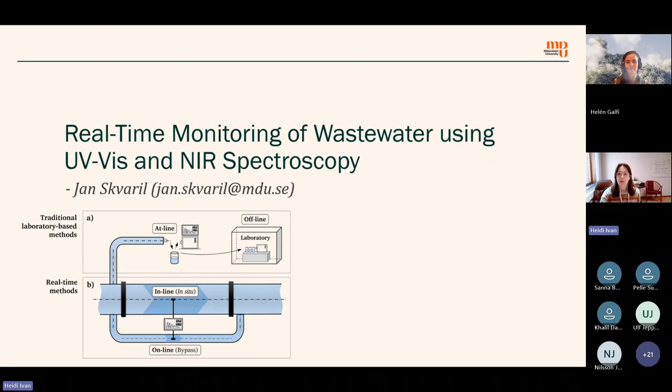Traditional laboratory-based measurements are usually used for quality control, and they can be quite expensive. They can also be time-consuming. They almost always introduce a delay. You don't have the result at the same time that you take the sample.

This makes them slightly harder to use for online process control, which really benefits from rapid measurements. Real-time measurements do not have this issue of delayed results, but are unfortunately often unreliable. This can be due to the harsh environment we have. Wastewater is not a very pleasant place for sensors to exist in. The sensors can be fouled, they can have a lot of wear and tear, and this can mean we have a lot of interference in the measurements.

But there's also the aspect of wastewater being a very complex mixture. That means we can have great challenges in detecting trace amounts or very low concentrations of very specific pollutants. But these real-time methods are evolving very quickly, and literature shows great promise to use them to detect contaminants that have traditionally been limited to offline analysis.

In this project, the proposal is to use UV-Vis and near-infrared spectroscopy as a real-time analysis method to detect a range of contaminants, probably a little bit up to you and your interests, but what we have been looking into up until now is heavy metals.

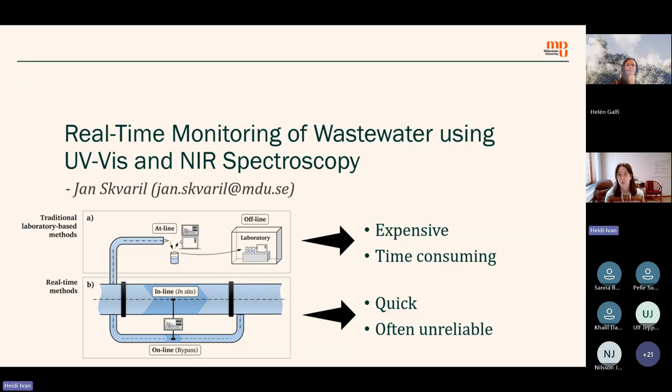In this project, if you work on it, you will have access to the existing data, but you will also have the opportunity to collect new data and develop the data set further. We have a UV-Vis spectrometer with a fiber optics probe for measuring in solutions. We also have a Bruker matrix dip probe and a micro NIR. We have other spectroscopic methods that could be used, but these are the ones that show the most promise for generating a data set that can be used for these purposes.

Then the main part of the project is, once you have this data, can you do the model development? We need to correlate the spectra and the laboratory results to try and see if we can predict what the laboratory results would be from the spectrum.

There's a lot of data analysis involved in this. Use machine learning methods, any sort of models that you want. I think so far we've been working with PCA-based models, but there's a lot of other options that can probably give higher accuracy.

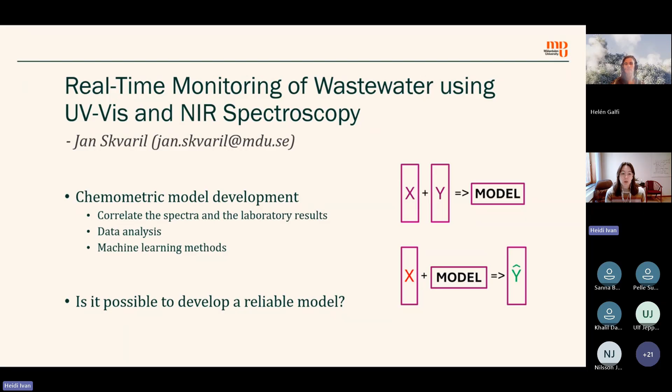The second project that I have to present is on behalf of Sebastian Schwede. This project does not involve any hands-on experimental work. It's an exploratory study that can be done remotely if you are not able to be present in Västerås, where we're based.

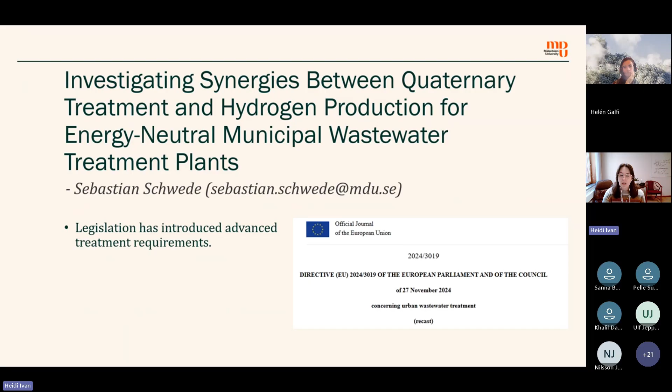The background to this project is really the update that came out last year to the Urban Wastewater Treatment Directive. We now have legislation that says we need advanced treatment methods, quaternary treatment in plants above a certain size, in order to focus on the removal of key micropollutants. At the same time, legislation now talks about energy neutrality, and by 2045 wastewater treatment plants must produce as much energy as they consume.

These goals often conflict. We see that advanced treatment methods can use more energy, but if we need to be energy neutral, we need to use less. So we think it's very important that before we go ahead and start implementing new systems in order to meet these requirements, we look for synergies—places where technologies can support each other.

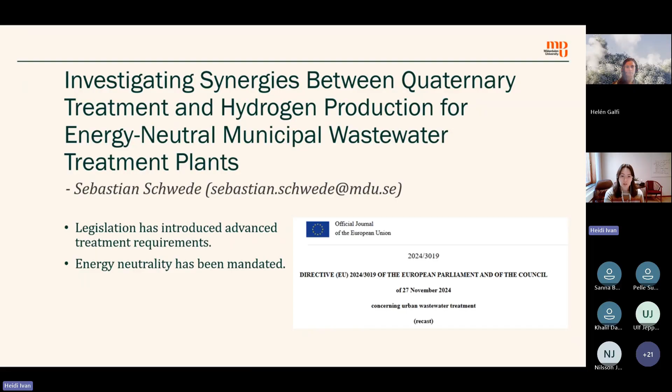Something we've identified as interesting is hydrogen production, especially through electrolysis. Electrolysis uses electricity to split water into hydrogen and oxygen. It's a clean process, but unfortunately it consumes a lot of water.

That's where wastewater comes in. Instead of using drinking water, which is very valuable and something we don't want to use if we don't have to, we can use treated wastewater as a feedstock for hydrogen production. Given the goal for energy neutrality, the idea of on-site hydrogen production at the wastewater treatment plant becomes very attractive.

Hydrogen can, of course, be produced by methods other than electrolysis, so this project is not limited to electrolysis, but we have some experience with this in our research group, so we propose it as a starting point since we can offer more support investigating this method.

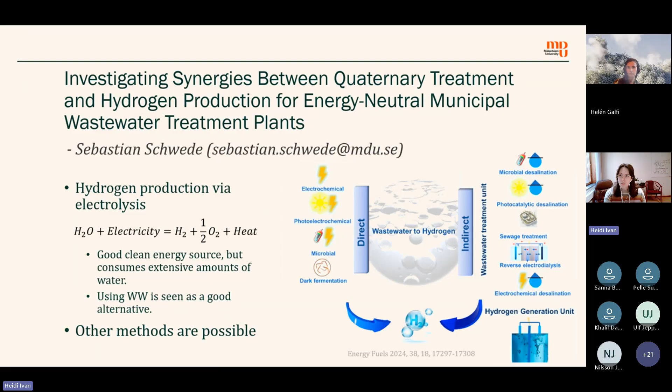The interesting part is how hydrogen production can synergize with the existing treatment process. For example, we can take the hydrogen produced and use it to upgrade the biogas, improving the methane content, making it a higher value fuel.

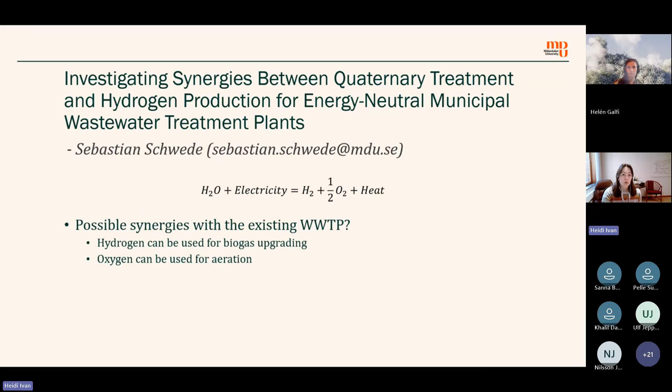We can also take the oxygen and feed it back into the treatment process to be used in aeration. Aeration is one of the biggest energy consumers in the wastewater treatment plant, so if we can reduce the energy consumption here and make it more efficient, that would be very valuable.

The main research question is: can these same synergies be extended to quaternary treatment technologies, like advanced oxidation or adsorption? Can the oxygen or hydrogen support pollutant removal? Can we use waste heat?

It's a very open project inviting exploration of these ideas. We want to see what advanced treatment technologies could work well with the combined generation of energy.

Again, if you have questions, I would point you to Sebastian Schwede, as he is the expert on this and can provide more details.

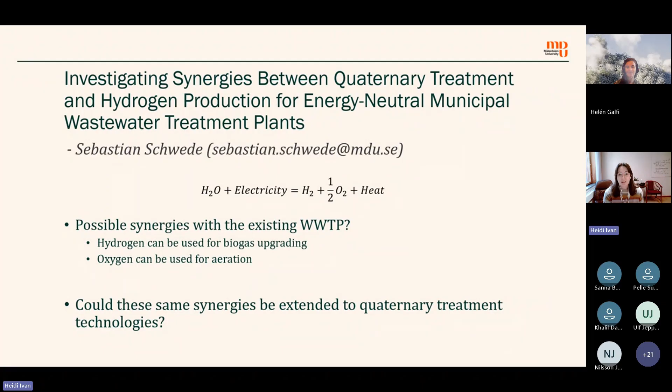The final project I present is part of a project I'm working on called Unity 4 Water, where we are looking at using treated wastewater for agricultural irrigation. Water scarcity all around the world pushes us to look for new sources of irrigation water, and due to the high nutrient content, nitrogen and phosphorus, in wastewater, we think it is a very promising option.

But before we can safely use it for irrigation, we have to make sure it is disinfected, free from harmful pathogens and contaminants, and that it meets legislative requirements. This is an excerpt from the most recent water reuse guidelines.

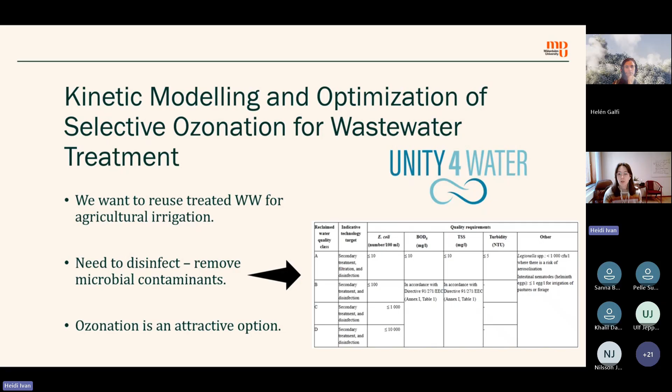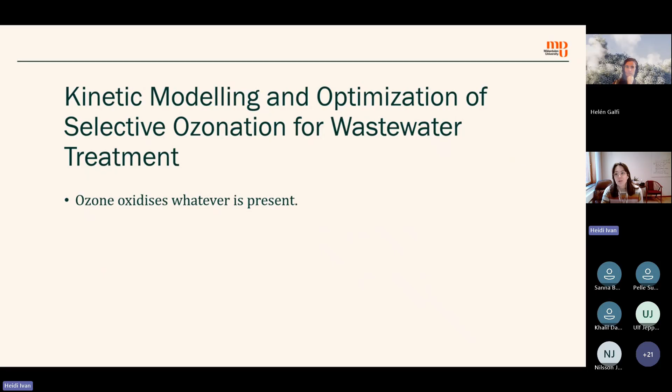Within our project, we have chosen to use ozone for this disinfection. Ozone is an extremely powerful oxidant. It reacts quickly with organic pollutants and microorganisms, but it doesn't discriminate. It can also oxidize the valuable nutrients in the water, like nitrogen and phosphorus, which we want to keep for irrigation.

Here you can see some results from preliminary tests we did, where it's very easy to remove the E. coli, for example, but if you just do it the simple way, you end up removing all of the nitrogen from the water as well.

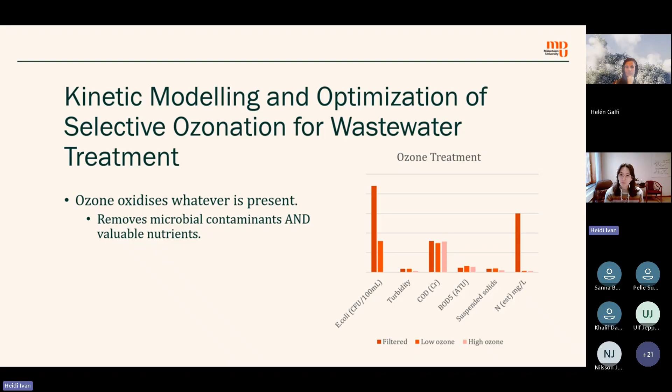Literature supports that you can do selective ozonation, where you manage to remove the key contaminants while retaining the nutrients. That is what we want to achieve in this project.

A good place to start, we think, is to model this. We can do experimental work using synthetic wastewater solutions, where we start with a very few number of constituents in the water, maybe a couple of key contaminants, and then gradually make it more complex and develop the model so we can understand how the ozone reacts under different conditions with different compounds.

Ozonation is not cheap energy-wise. We really need to find a way to make it most efficient, to remove as many contaminants as possible while removing as few nutrients as possible.

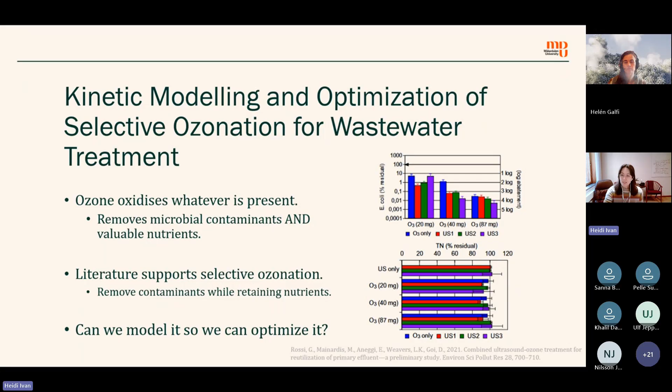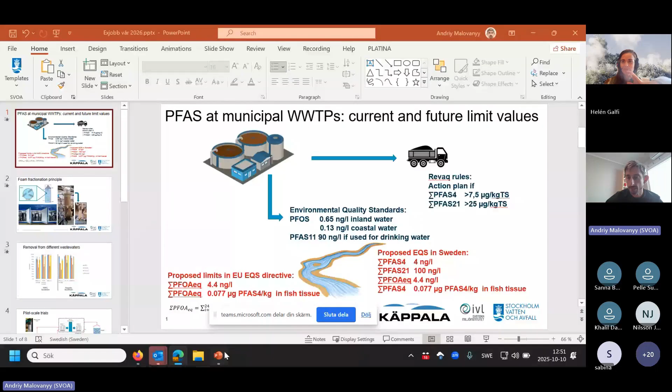Yeah, let me see, I just share my screen and we'll see if you see it. Yes, we see it, and now it's coming into presentation mode. We see also your explanation slide. Yeah, let me see if I can fix it. No, it's fine.

So the project is focused on PFAS removal. I don't have a slide on what PFAS are, but that's a group of substances which has a very high potential for carcinogenic effect, and usually it's found in firefighting foams. In municipal wastewater treatment plants, usually, or up until now, it was not that high of an issue - it was mostly for high concentrated streams that was a problem.

But now there is legislation actually requiring some kind of treatment, or at least limits on concentrations in the natural water, and there are some rules for sludge handling regarding PFAS. There is coming new legislation both in Sweden and on EU level, which could mean that in future some wastewater treatment plants would be required to remove PFAS. Actually in Käppala, in their new permit, they have a limit on PFAS discharge to the coastal water with their treated wastewater.

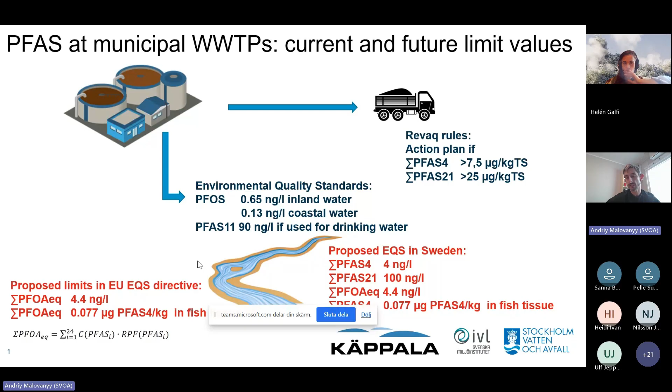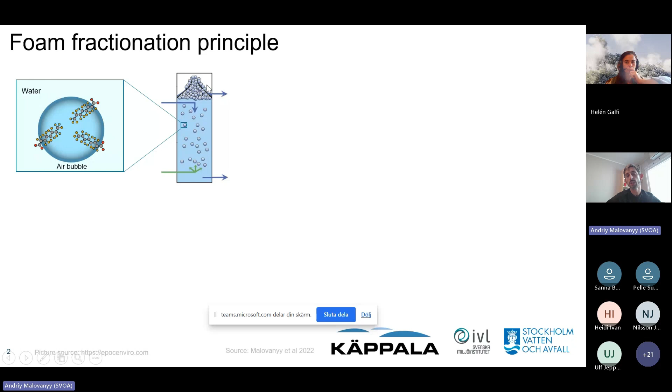The idea is to use foam fractionation technique. It's a technique where you aerate the water, and PFAS stick to the air bubbles and rise, and then you collect the foam and thereby collect PFAS. You can do it in a few stages, so you separate the foam, collect it, then do it again, collect the foam from this concentrate, and concentrate it a lot of times.

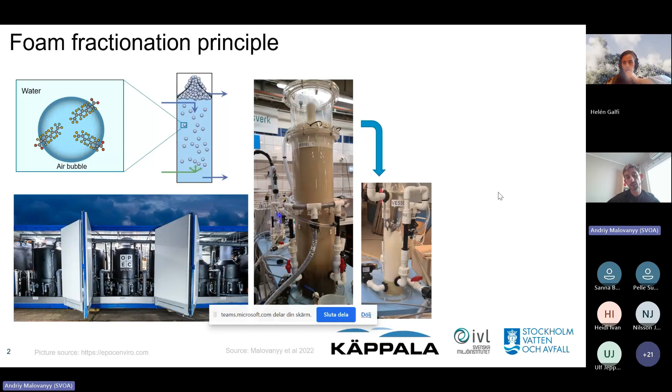So these systems are available for high concentrated, low volume streams, but not for municipal wastewater yet.

But those are results from small scale, so the next step is to scale it up to pilot scale. There are also some results about the sludge, but I will not go into detail on that.

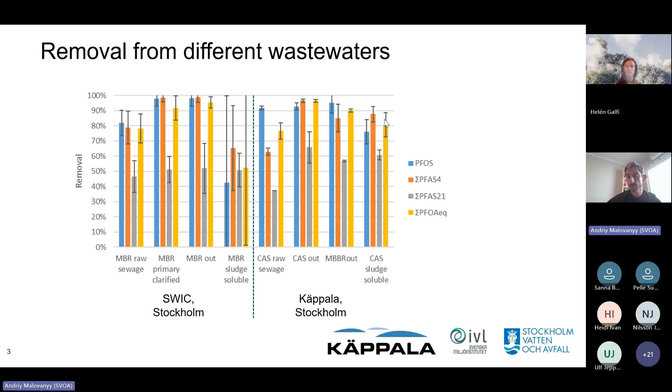So we got a new project, and what we will do is continue this kind of small scale trials in a small column, but also integrate it into big pilot plants. We're talking about 3 cubic meters per hour of water coming in, and we try to collect the foam in different stages of the biological treatment. Then when we have it, we try to concentrate it again to see how much we can remove and how high we can reach the concentration. We also try MBBR, and also for digested sludge, the same thing.

So the work is going to be performed at Sjöstadsverket Water Innovation Center, SWIC, which is operated by IVL and partly KTH. That's a facility where we have several pilots which we run in cooperation with IVL, so it's more like a wastewater treatment plant in a small scale.

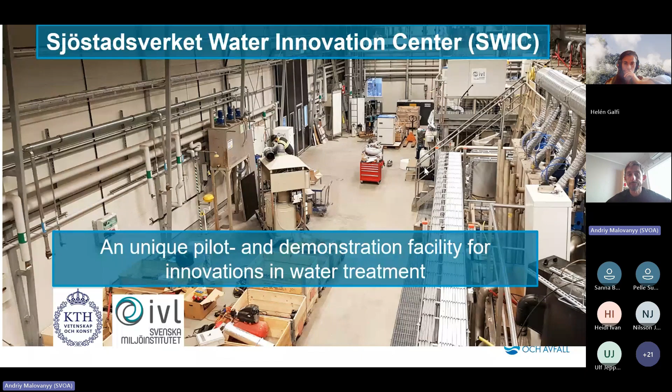We already started doing some tests. We have one master's thesis student working now from Mälardalen University, and he's doing the trials in a small scale, collecting foam. We are actually here today also doing trials, and we've also started some work on installing this foam collection equipment in a bigger scale.

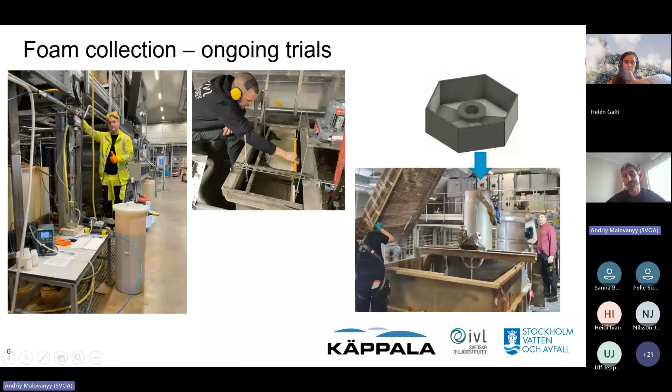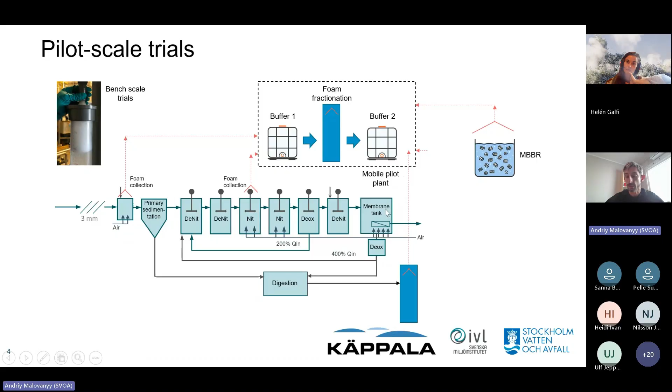So if I go back to this slide, we are somewhere here that we did this one, and we are trying this part of the system, but the master's thesis student will mostly focus on the whole integration. This pilot is going to be built now, probably beginning of next year. So some work of the student will be on the actual collection, for which we don't need the pilot, and then when the pilot is there, we can integrate it and run everything together.

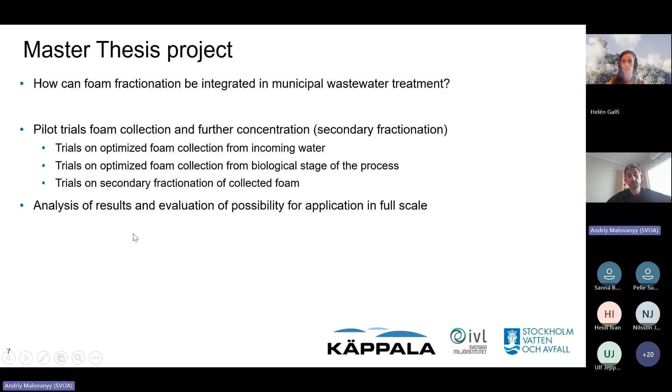So the main question for the project is how foam fractionation can be integrated in a municipal wastewater treatment plant, and that will be investigated by pilot trials on foam collection and then further concentration. So two places where we actually extract the foam and then how we concentrate it further. And then, of course, analysis of the results and evaluation of possibility for full-scale application.

How to apply and who we are looking for - I would be the industrial supervisor from SVOA. That's my email address, I will write it in the chat as well. Then we have other practical supervisors from SVOA and IVL.

The work will be practically oriented, so a lot of experiments. It's good if there is some experience in pilot operations, in lab, chemical lab, and so on. We are at least looking for someone who is able to be here every day - it doesn't mean every day for half a year, some work can be done from home, but we want the student to be engaged and here as much as possible.

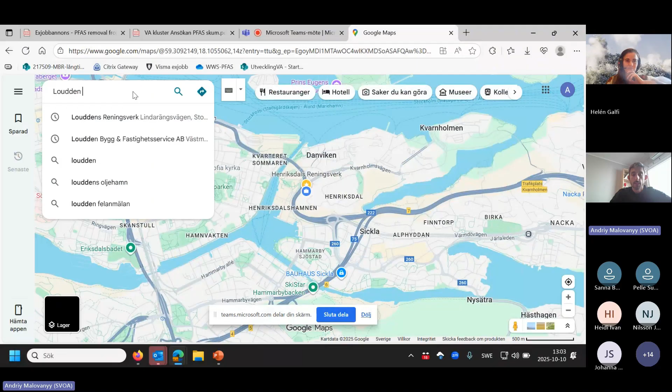Yeah, Svik—if you Google it, I can actually show you. So it's located in Stockholm. If you search for Loudden reningsverk, it's here, next to Kaknästornet, for those who know. There's a bus from Central Station which stops about a 10 minute walk away, and you're there.

And one more question for you: when is the deadline to apply, and should students email for the link to apply, or wait for it to be updated on the website? They can email me and just say they're interested, and as soon as it's published, probably next week, I'll send them the link and they can apply. Usually we have a period of at least two weeks for people to apply, so maybe until the end of November, but we'll look at applications from the beginning.